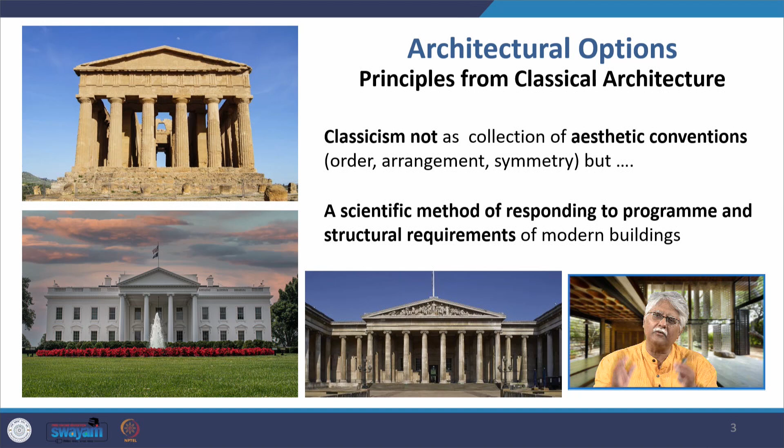The second option was borrowing from the principles of classical architecture. They argued that classicism is not just a set or collection of aesthetic conventions like order, arrangement, and symmetry, but rather a scientific method of responding to the programs and structural requirements of modern buildings.

For example, we can take the classical principle of symmetry and regularity and bend it to modern-day needs. Columns in classical architecture, organized at fixed center-to-center distances, can be modified so the gap between them is increased, and that gap can be bridged with flat arches stiffened through iron, instead of using a lintel as was done earlier in Greek architecture.

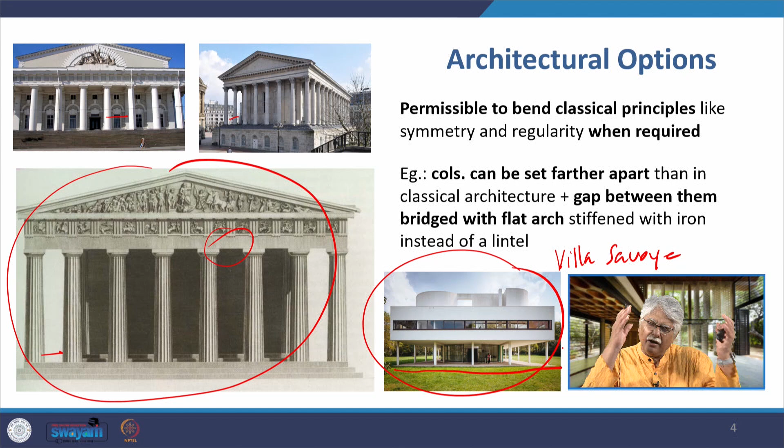A further evolution happened in the 20th century with examples like the Villa Savoye, which we have seen earlier in other contexts. Here again you see classical principles at work, with pilotis—round columns spaced apart from each other—and a facade borrowing heavily from classical symmetry.

It is also sensible to revise the proportions of structural elements due to the new strength available in materials like steel, and because of changing functional demands. So if we have columns, we can make them very slender, as seen here, with a capital, a shaft, and a base—for example, this slender steel column, widely spaced apart.

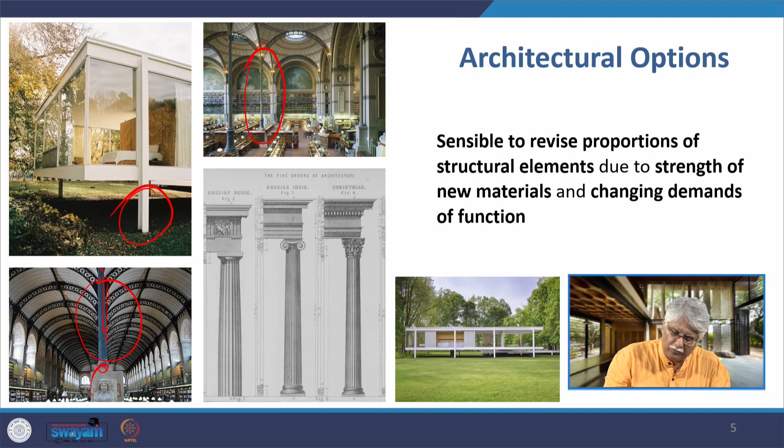In modern times, Mies van der Rohe began to use I-beam sections, as in the Farnsworth House, where he spaced the columns wide apart from each other.

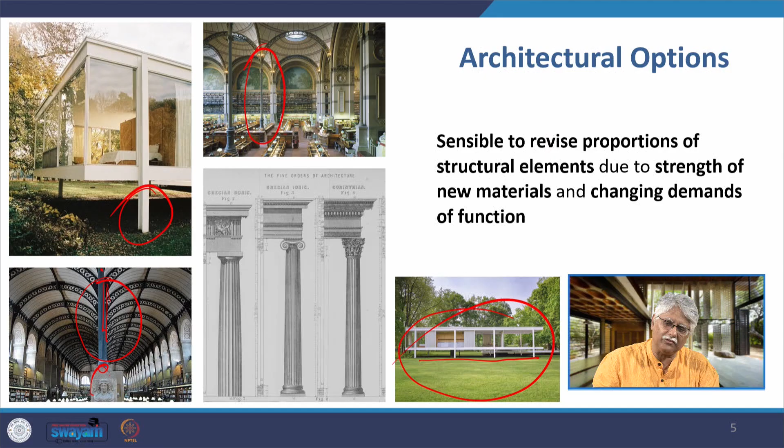In contemporary times, we see tremendous classical symmetry in the Quadracci Pavilion at the Milwaukee Art Museum by Santiago Calatrava, the symmetrical circular Apple Park building in California by Norman Foster, the strong central axial symmetry in the National Theatre of China in Beijing by Paul Andreu, and the Birmingham Central Library, which though not having very strong symmetry, still pulls us toward that idea.

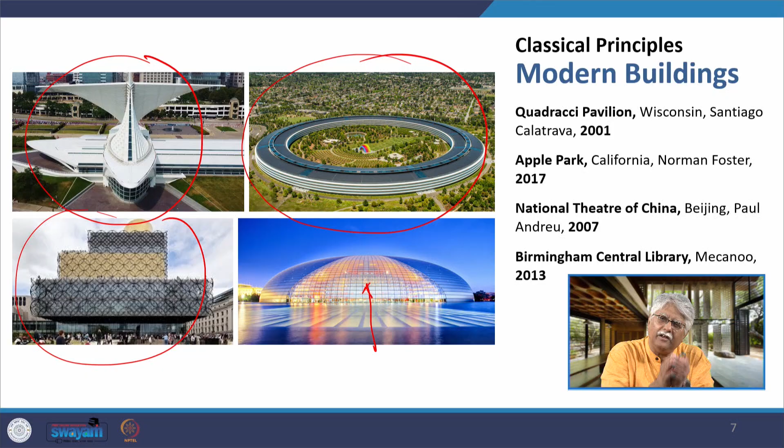We also saw classical principles appearing earlier in the 20th century in different ways, such as in the Glass House of 1949, the National Gallery of Art by I.M. Pei, and the Hong Kong Cultural Center.

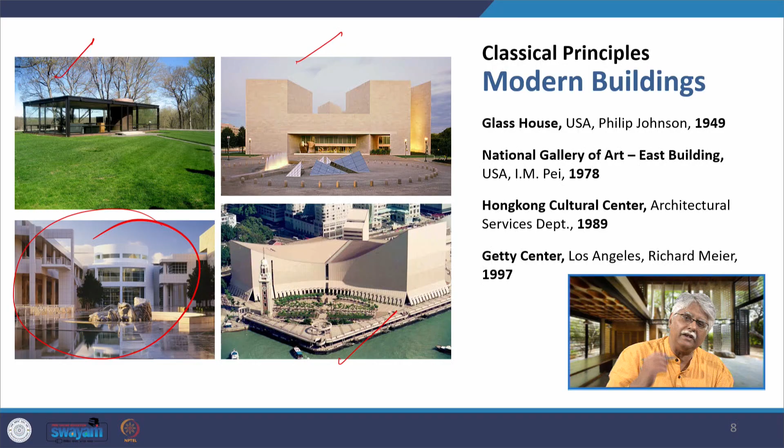This building, though seemingly not at all classical in symmetry, borrows from classical principles. You can read it up in the Getty Center by Richard Meier, 1997.

Classical principles were also adopted in tall buildings. You see them appearing in the Seagram in 1958, in the Bank of China Tower in 1990, very clearly evident in the Petronas Towers in Kuala Lumpur by Cesar Pelli, and it appeared in the Lotte World Tower in South Korea by Kohn Pedersen Fox in 2016.

The reason I am showing you these new buildings of early 20th century, late 20th century, early 21st century is because I want to connect those developments happening in the 19th century with today's architecture, so you as students can link the changes there with the advances they led to in the 20th and 21st century.

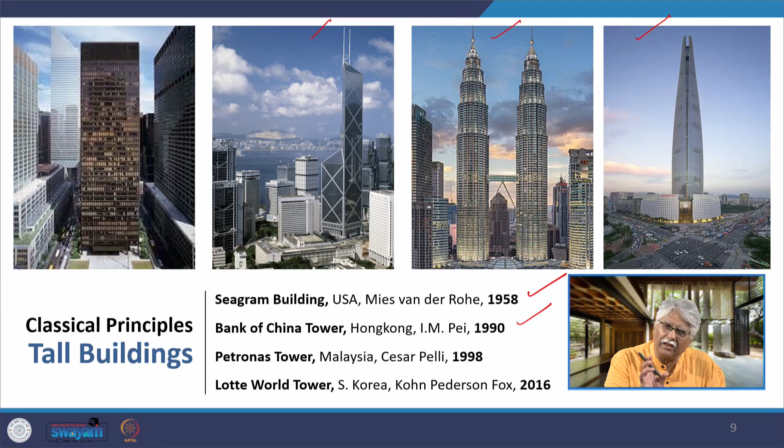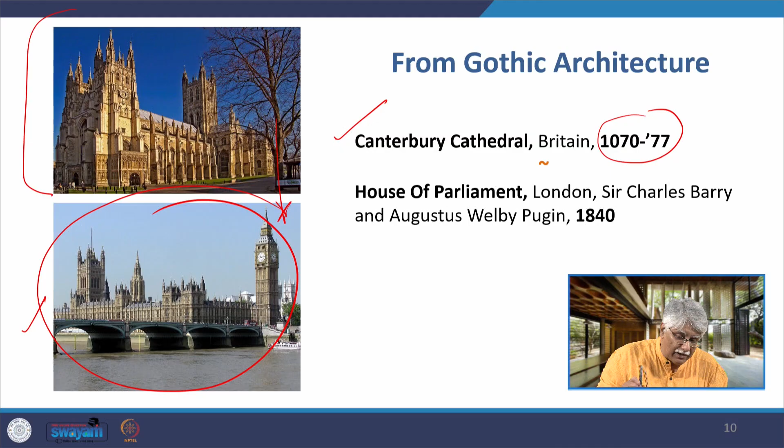Another thing they had used was Gothic architecture. This is Canterbury Cathedral, built 1070 to 77, about 1,000 years back from us, which got borrowed in the design of the House of Parliament in London by Charles Barry and Augustus Pugin in 1840. You can clearly see the evidence of Gothic architecture in the House of Parliament.

Therefore this architectural option, this Gothic revival, took place, and its skeletal expression we see in the 19th century all the way into the 20th, 21st centuries.

If you see these ribbed forms in a Gothic cathedral, then you find this kind of form in this station by Calatrava, I believe, or in this building, or even in this. So this skeletal expression of exposed tensile members that we see in Gothic architecture has a much wider reflection in the 20th and now in the 21st century.

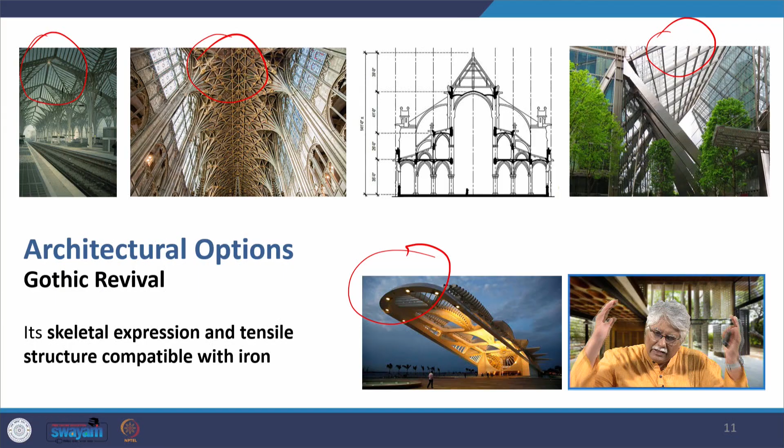We find so many buildings, particularly if you want a specific example, it is the work of Santiago Calatrava, where these tensile steel filigree of members is what you find in his buildings.

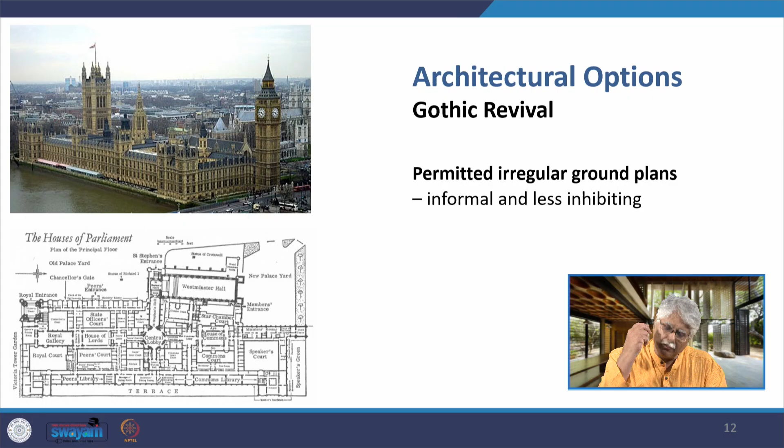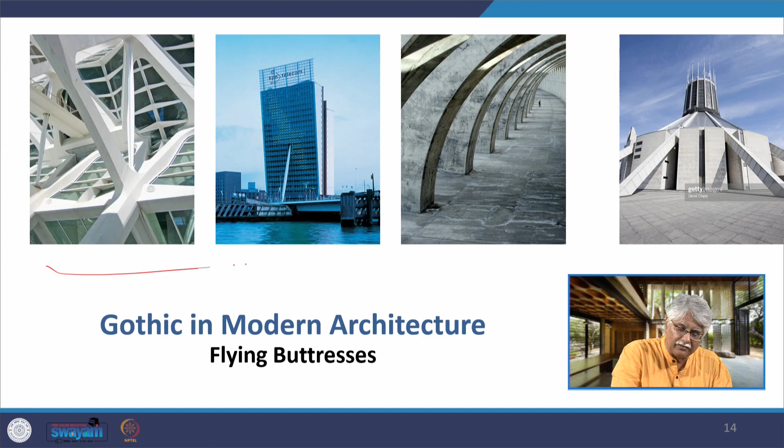Gothic revival also permitted irregular plans, like in the House of Parliament, which were more informal and less inhibiting. Gothic in modern architecture as an aesthetic appears in many buildings, in skyscrapers, or in the form of elements of Gothic architecture. We saw this earlier also, that these flying buttresses are seen in modern buildings.

So we've seen Renaissance principles, classical principles, Gothic revival. The fourth option, which had a much wider application, was eclecticism, a collection of historical styles. One very interesting building is this one, where you find an Egyptian pylon, a Greek Parthenon temple, with the Hindu Shikhara on top.

Here I have just put the images together. I wish I was much better in AI to do something with it, but here you have it, the Egyptian pylon mounted by the classical temple, mounted by the Shikhara. Eclecticism. Now, how is there a Shikhara here in London?

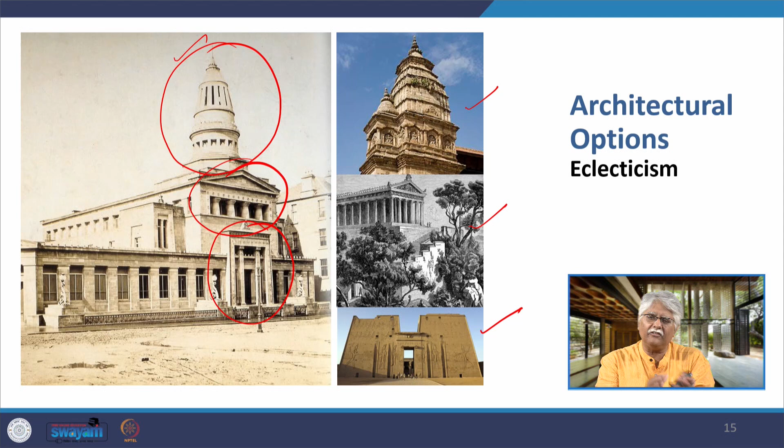Because the British Empire was extending in all these regions, we see eclecticism in one famous example, the St. Pancras station in London by William Barlow, 1864 to 68. It has a style where you can clearly see part of it is Renaissance, another part is Gothic Revival architecture, and the building has iron hidden outside and exposed inside.

If you remember, last time I told you architects dealt with iron in three ways: first, by hiding it both inside and outside; second, by exposing it inside and hiding it outside; and third, which we will look at in Crystal Palace, exposing it both inside and outside.

The Crystal Palace was not designed by an architect, but by a gardener called Joseph Paxton.

No type was available to express and articulate the junction between the head building and the train shed, as Kenneth Frampton defines it. At the point of junction between the main building outside and where the train shed or vault begins, there is no clear way of harmoniously putting them together so that one flows into the other. It was clear the building is eclectic, the train shed a technological marvel, but both are not fusing together organically. That articulation is not clear.

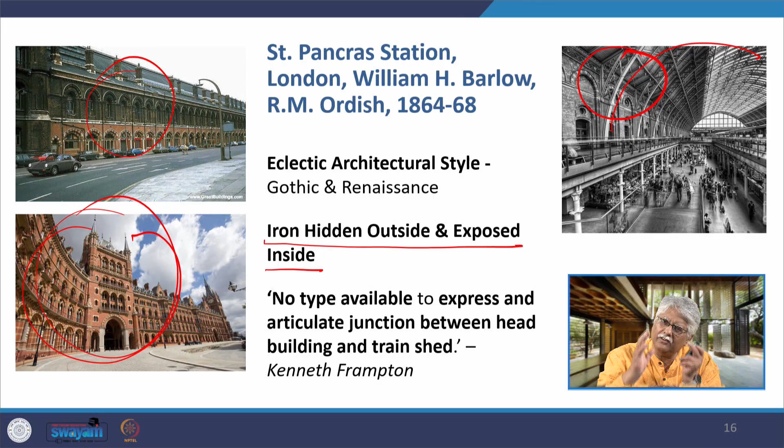Talking about the iron vault itself, it stretched over the tracks, and you can see this massive vault in St. Pancras station.

And not only is it an iron vault, as I told you earlier, it also has glass fitted inside it so that the daylight can filter in. I get really excited when I look at this because I know that this is going to lead to far greater things, all the way into our modern architecture today.

This engineering was much more forward looking than the architecture. The architecture was backward looking. The architecture was borrowing from history, but the technology that we see in the iron vault was looking ahead into a later period. So the art itself is not having that rapid progress as technology is having.

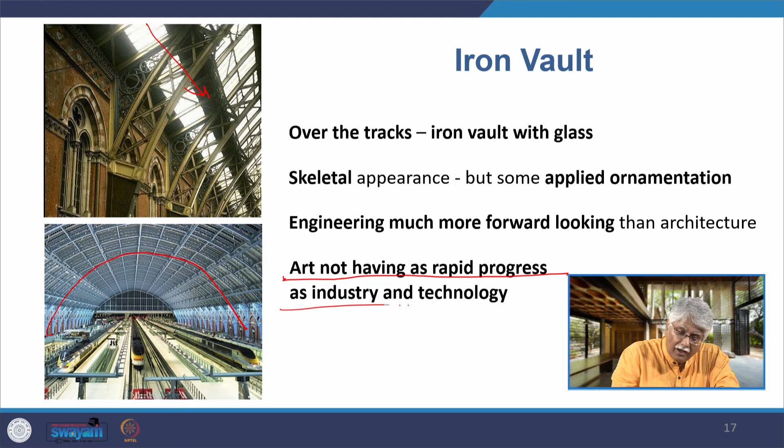Now, evolving construction techniques led to these large span structures; this is a 74-meter clear single span. Please understand that this development was made possible because of bridge construction, because bridges like the first one in Coalbrookdale, leading on to larger span bridges, gave them the idea that steel could be used for spanning spaces without intermediate column support, and thus these large span iron vaults came up in stations also.

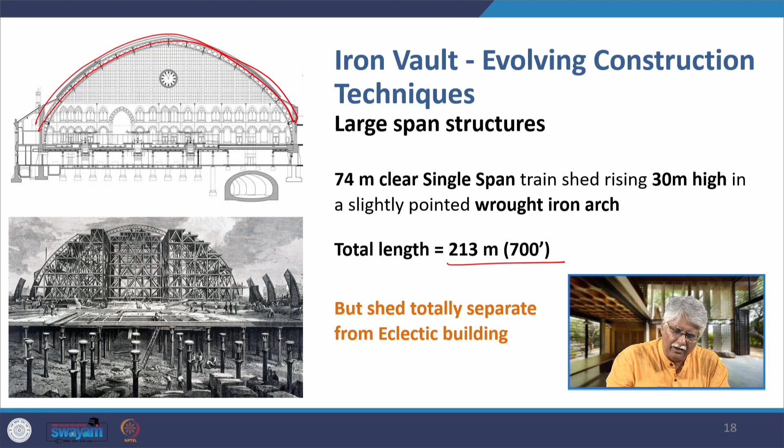Do you see how one development in technology is leading to another? How exciting architecture is becoming. And here the total length of the vault is 213 meters, about 700 feet, and the only thing, as Kenneth Frampton says, is that there is no clear articulation between the building and the shed. The shed is totally separate from the eclectic building.

Now, this comprehensive architectural solution was very much needed as the railway termini became the new gateways to our cities. Today the gateways to our cities are airports. That is why there is such a lot of architectural effort made in designing magnificent airports. In those days, that gateway used to be the railway station.

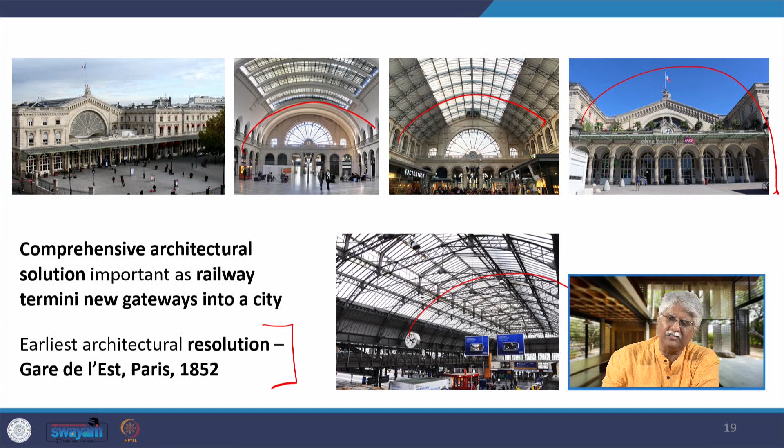Now, the earliest architectural resolution happened in a station in Paris in 1852, where there seems to be a much better articulation of the built form on the outside leading to the vault or the shed on the inside. Much better articulation. Now, if you look at these 19th century stations today, they have not been pulled down. They are being reused, they have been renovated for modern use.

You can find that in St. Pancras station, you can find that in Paddington station. Both 19th century stations. We saw this shed earlier. If we go back in this slide, you can see this shed here. This of course is also a modern picture of how the shed is today, and you find this change happening.

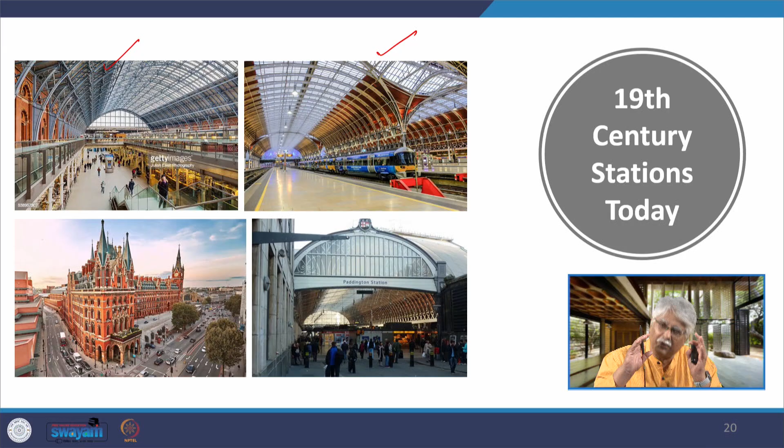Now, what does this show us? The one thing, of course, is the building is still durable. More importantly, the iron shed is still pretty much structurally safe as it was in the 19th century. But stations have undergone a massive change. So, I will correct my statement by saying that today railway stations are also becoming those gateways to cities.

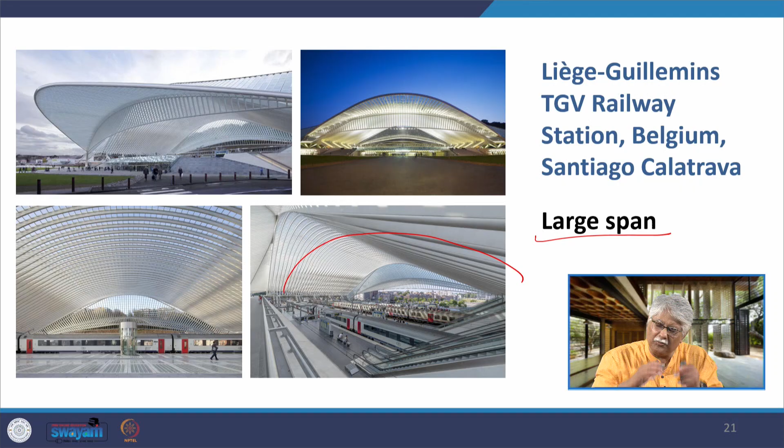They are very symbolically important, and particularly we find that in Europe, with this station in Belgium having a large span, and you can see how technology has evolved. This is also in glass and steel. The span is way larger than in those days, and it is much more magnificent, much more geometrically abstract and attractive compared to the simple geometry of the iron vaults in the 19th century.

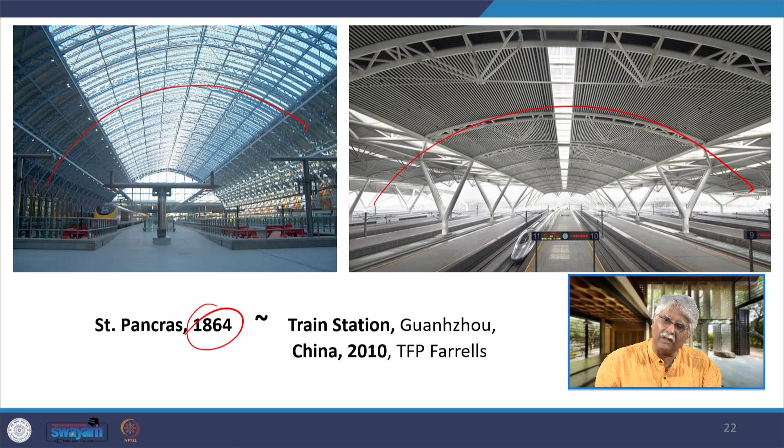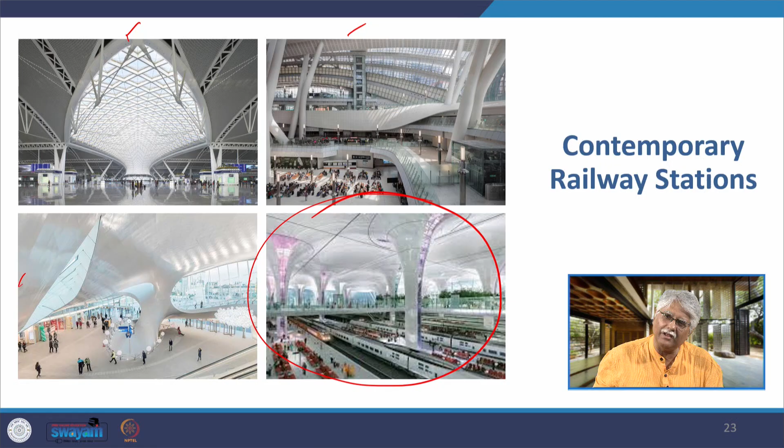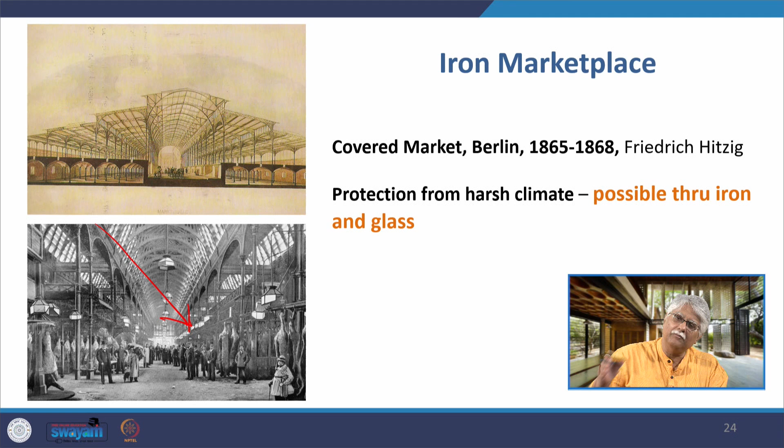So, you can see now not only railway stations, but marketplaces are also changing, and this led to the development of the department store and the shopping arcade. A very major development because of the changing social structure, because of vast urbanization. There was a vast population in cities, and this population was leading to the development of the middle class, because they were working in factories, in railway stations and allied services.

These people had money. Factories were producing goods in vast quantities which were much cheaper than the earlier products made in home guilds. These people could afford this, but these vast quantities of materials had to be sold not through one single shop, for example, but an entire department store or shopping arcades.

This was another impact of iron and glass, that these shopping arcades or these department stores, for example here, could be covered by these structures or framework in iron and glass, and they had a dramatic appearance of the department store in the mid 19th century. Now, there was a completely new shopping experience which permanently reshaped our shopping habits because of mass produced goods having lower cost, variety, accessible to the new rising middle class which had a disposable income.

So, can you see, it is not one thing, 2-3 things are working together to change architecture. One is, of course, the technology leading to the covering of these spaces and being able to work and shop in them even in harsh conditions. That is number one. Number two, the social change that is happening, because people have shifted here, middle class is rising, goods are becoming cheaper, they need to shop, they need to buy these goods, so the need of a shopping experience. And there are other changes that are coming in, which I will talk about.

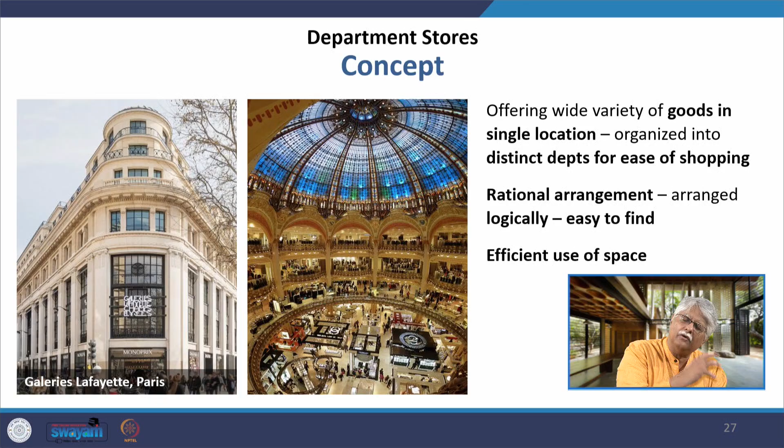Now, the concept itself is: a department store offers a very wide variety of goods in a single location. They are organized into distinct departments under that one single roof, so that you could buy different goods from different departments and the shopping experience becomes easier. There is a rational arrangement making it easy to find the product you are looking for and an efficient use of space. Now, the shopping mall, somewhat different in concept from department stores, pretty much follows a similar pattern.

Now, the other technological advancements that helped the department store include improved transportation. People could now move more easily within the cities through public transportation, for example, streetcars or railways. Streetcars within the city, railways connecting town to town, city to city, steel and glass of course, along with elevators. Elisha Otis came up with the modern elevator around the mid 19th century. We will talk more about it in Chicago when we talk about the tall office building.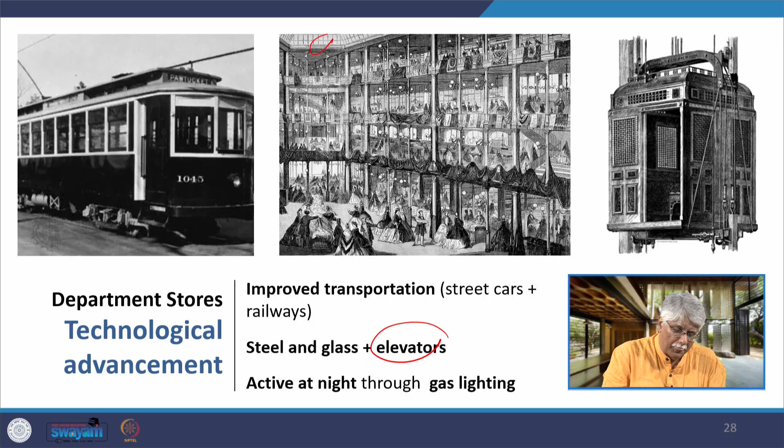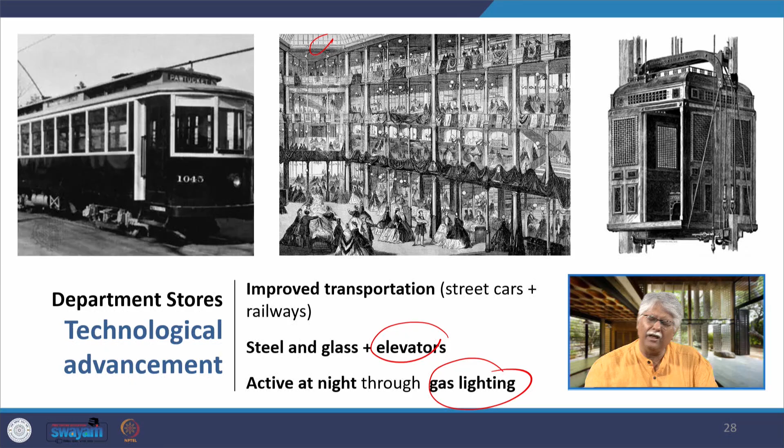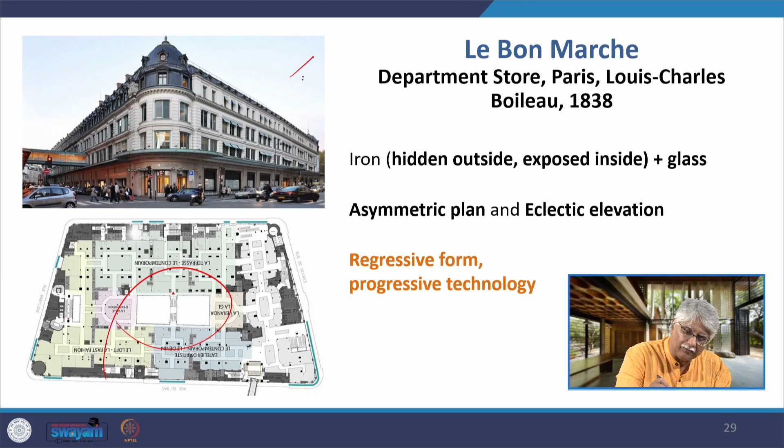One more thing that happened was gas lighting. Gas lighting helped to make the shopping experience alive at night. Now you could finish your work in the day and come to shop at night, and thus we have major department stores coming up like Le Bon Marché in Paris, where iron was hidden outside, exposed inside, and it had this huge space in the middle, where an iron and glass frame was there and light would filter in. So the form itself is regressive, looking backward, with the technology being used as progressive, looking forward.

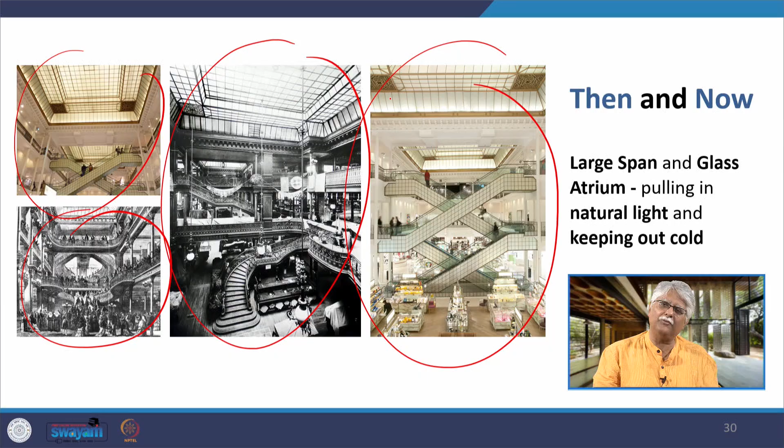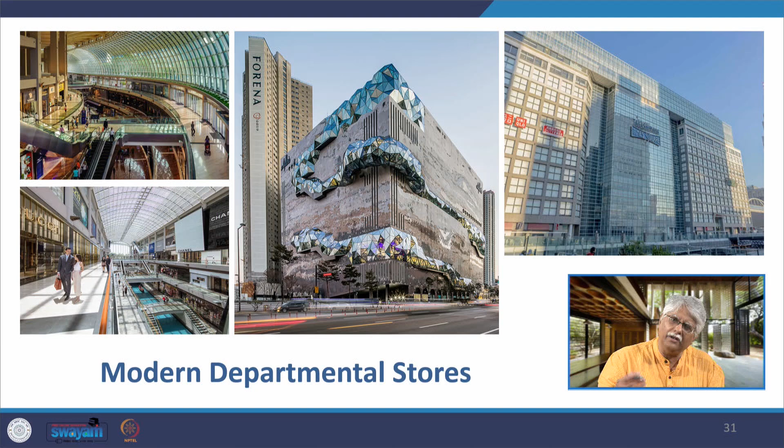Now, how the Bon Marché itself is transformed from what it was at that time to what Bon Marché is today in the 21st century. And then modern department stores, shopping malls have come up all over the world, from Southeast Asia, Singapore, Europe, India, America, China of course. And these modern department stores have atriums. Nearly all of us have experienced this when we go to a shopping mall where there is a huge atrium covered by this framework of glass and steel, and light is filtering in. There are escalators or even elevators running through and giving you this vast shopping experience.

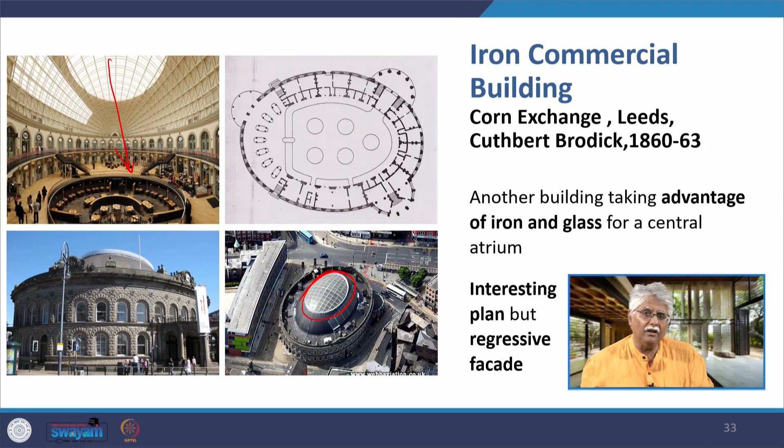Another building that came up was the iron commercial building. When you produce goods at such a mass level, you need to sell those goods, even at a stock exchange, or when you are producing farm produce, there were corn exchanges for them. Another building taking advantage of iron and glass because of this kind of framework at the top, and in the corn exchange here in Leeds, light can filter in. These are the modern day exchanges, contemporary exchanges that we find.

This is the Midwest Commodity Exchange Center in China. It is a trade center for metal products, and you see how marvelous kind of forms we are coming up with today. It's got completely new design details. It's got how we can now use technology to create such kind of access within the buildings, and we are using another new material called structural silicone glazed curtain walling system.

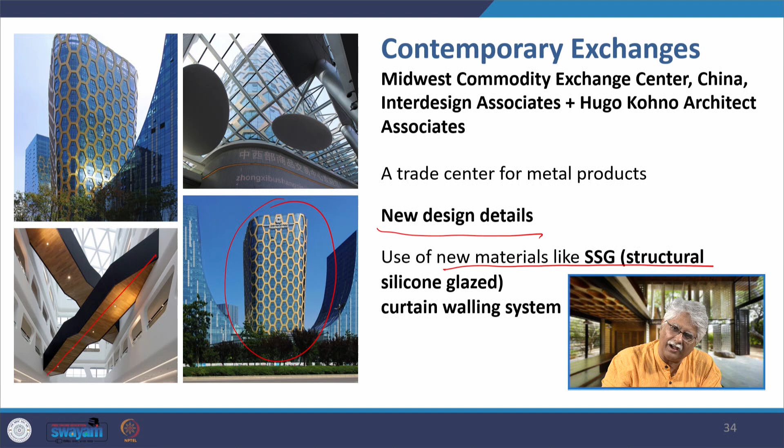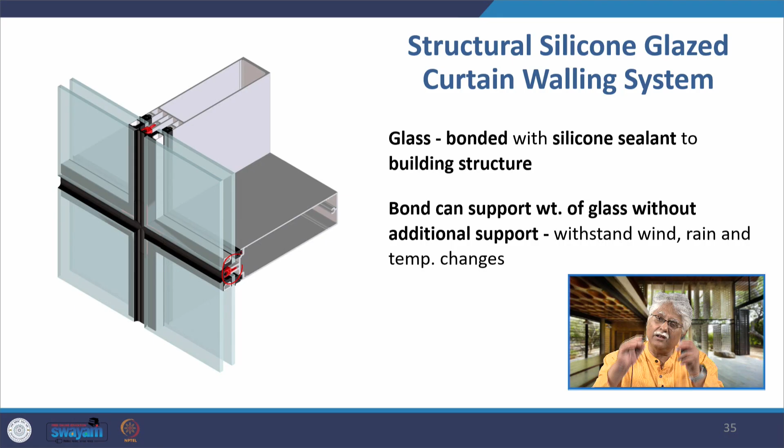Now, like I said, I will continue to go back and forth to completely stitch together this picture of modern architecture. So, I will talk about structural silicone glazed curtain walling system here. Coming up in our modern times, it is glass which is bonded to the building structure using a silicone sealant, and the bond can support the weight of the glass without any additional support. It can withstand wind, rain and temperature changes.

Now, this kind of walling system we find in high-end buildings all over the world. Wherever you have buildings in glass or facades in glass, curtain walls in glass, without having any transoms and mullions, then you can understand that is a silicone glazing system, where silicone is the sealant connecting one pane to the other. You will find them in public buildings, commercial buildings, in airports, etc. They are used in high wind and high seismic areas to improve the structural stability of the envelope.

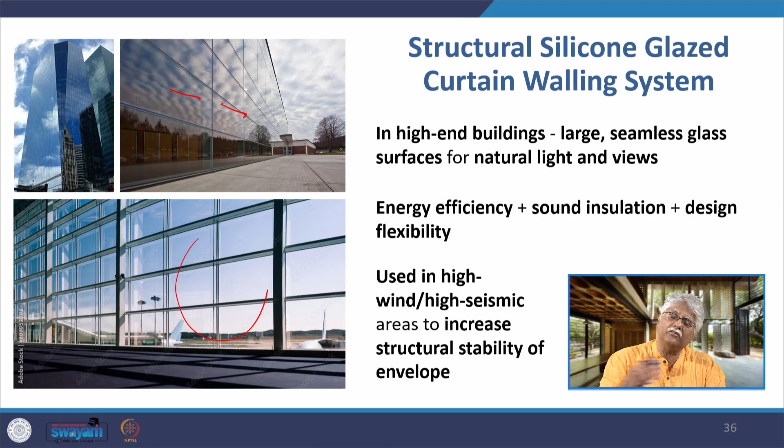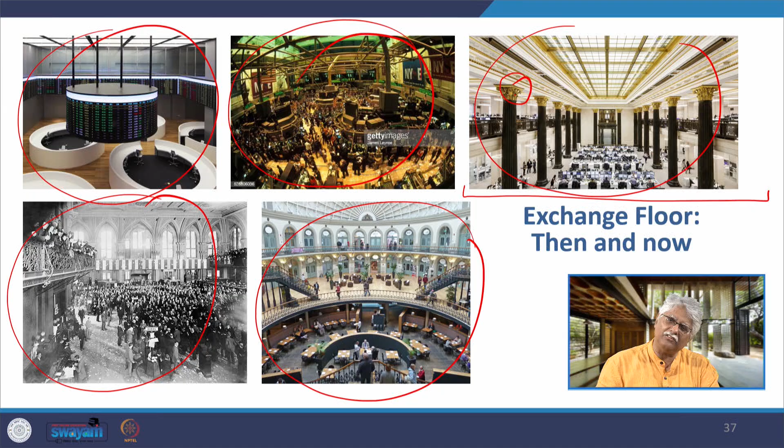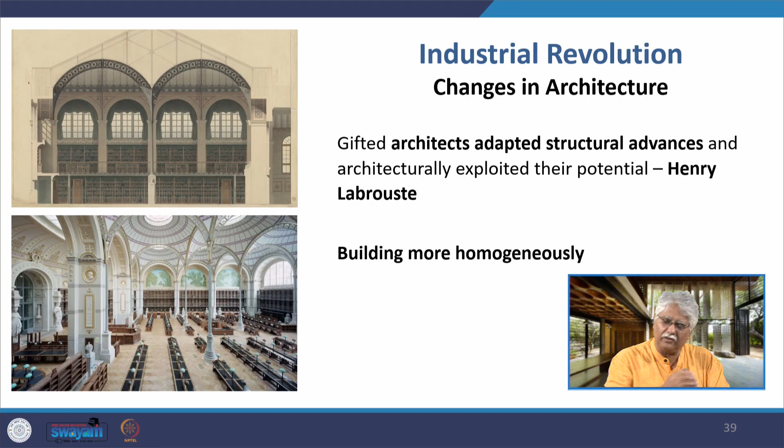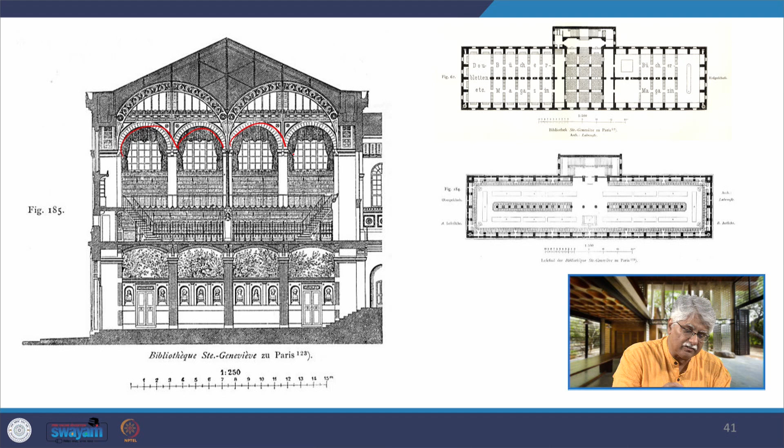In this building you will find that there are these barrel vaults inside which are being supported by iron columns, and here they are. These are the iron columns having base, shaft and capital, and it is very slender. It is not like a stone column, it is an iron column, and in fact it also has fluting. So, there are these iron barrel vaults supported by these iron columns. There are twin barrel vaults supported by this column, and there is light filtering in through these Renaissance windows.

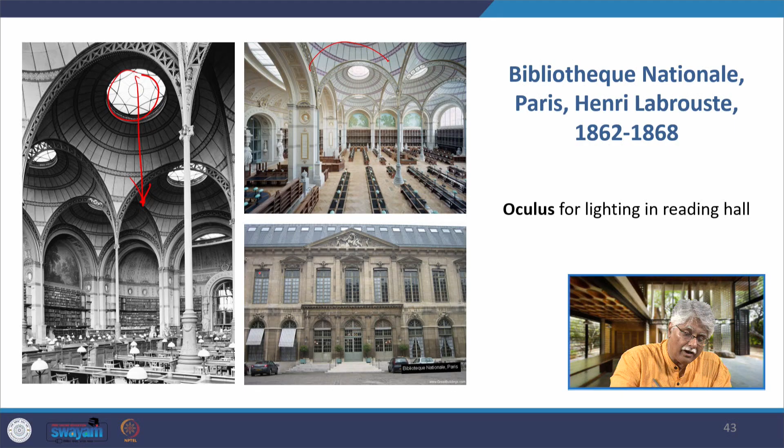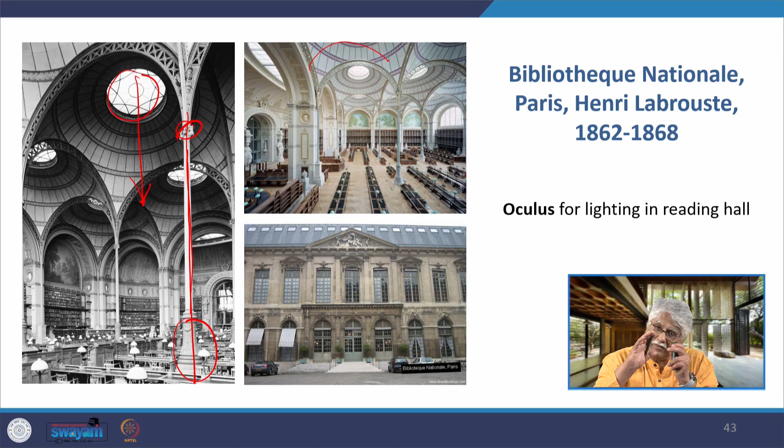Then he moved on to another library building called the Bibliothèque Nationale in Paris, in which he brought in oculus eyepieces from which light was filtered in. He created these domes, and domes were supported over these iron columns, having a base, a shaft and a capital, but very different from the earlier columns and very slender. So, we find Labrouste marrying his structure more homogeneously with the iron frame inside.

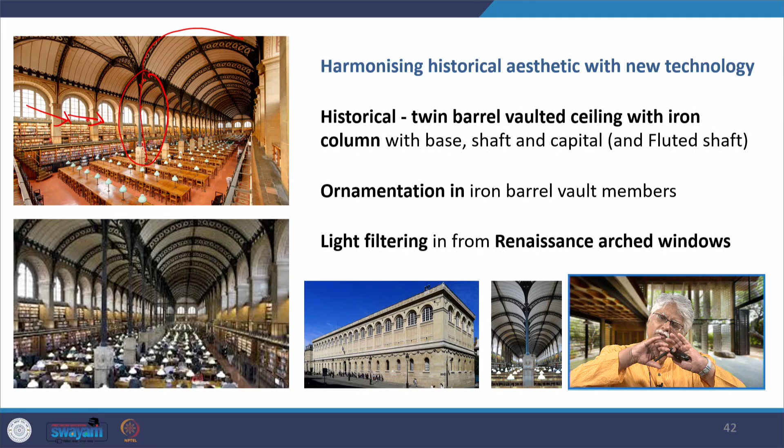So, what I have done in this entire presentation is I have tried to connect those older buildings, those principles that began to be used there, and how they have started getting reflected in the buildings of today. So, that also indicates those changes that happened during that time were so vital, and they have impacted our buildings today. I will continue to go back and forth like this, and by doing that stitch together the entire picture of modern world architecture.